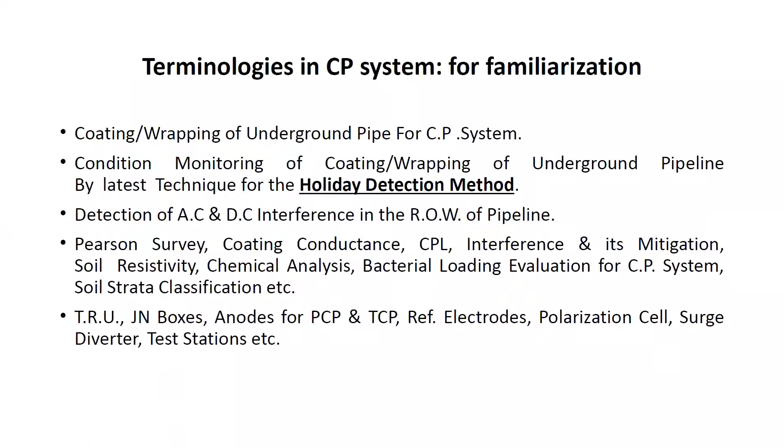Some of the applicable standards in engineering activities: as I said in the beginning of the presentation, since I work in a downstream gas processing unit, these are the applicable standards for mounded LPG storage bullets, where a cathodic protection system is there. We are following these two standards. The entire basis of design for the CP system used for the mounded bullet system is based on NACE SP0285

2011, which is for external corrosion control of underground storage tank systems by cathodic protection, and another standard called OISD 150. OISD stands for Oil Industry Safety Directorate. OISD 150 deals with design and safety requirements for LPG mounded storage facilities. NACE is a US-based international organization. NACE stands for National Association of Corrosion Engineers. They are the certifying body for level 1, level 2, level 3 surveyors and engineers for corrosion.

And OISD is an Indian body which prepares the standards for mounded storage bullets, which mention the CP system and the requirement of the cathodic protection system. So these are the applicable standards pertaining to my industry, to be precise.

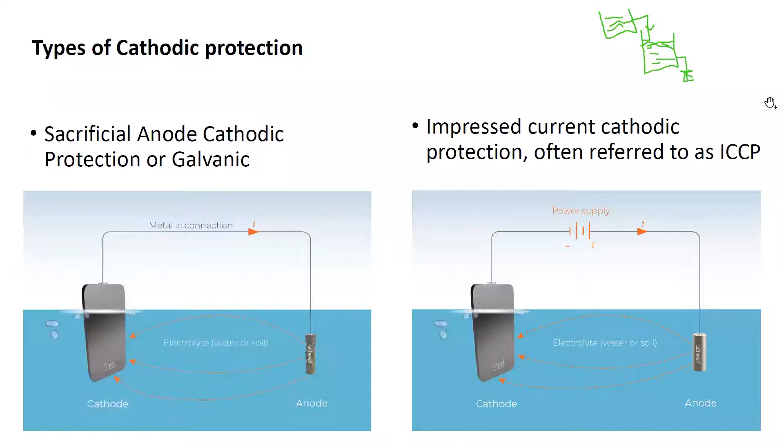Now, criteria for cathodic protection. Now, this needs to be deleted, right? Yes, sir. Okay. Hope you guys are following me.

Yes, sir. Okay. So, the primary criteria for cathodic protection are, I won't say three, there are basically four. The first one is the voltage, that is the potential difference with respect to a reference electrode, a half cell, a copper sulfate half cell. The potential difference with respect to the half cell when the protective current is on has to be between 0.85 to about 1.15. Now I'll explain. It may sound a bit confusing.

Now what exactly does this mean? Let me go to a picture so that I can explain it in a better way. So it says that the primary criteria for cathodic protection for underground or submerged steel or cast iron pipes are: the first one says minus 0.85 volt with respect to a copper sulfate half cell reference electrode with protective current on. Now what does this mean?

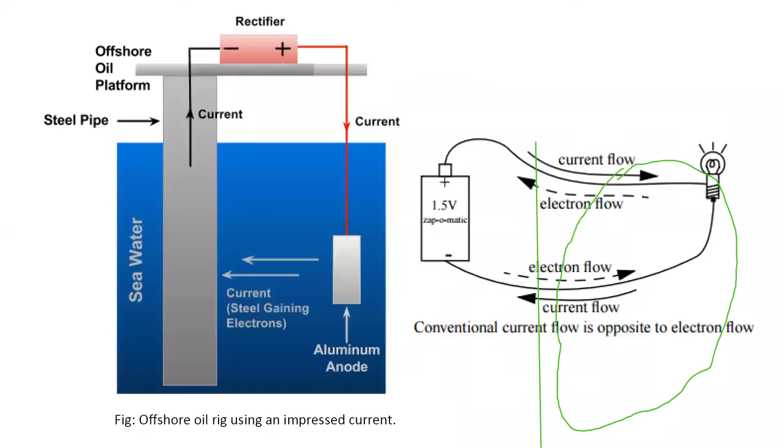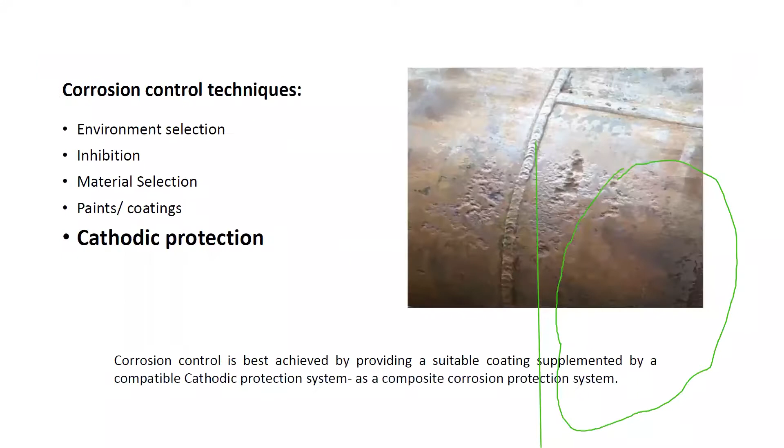Like this, if you take a voltmeter and connect one terminal to the ground and one terminal with a pipe, and try to measure the voltage. If the voltage is measurable in those conditions, then you will get a reading, and that is called natural potential. So you now know what natural potential is, right?

Next is off potential. As I said, off potential is when this is instant off. Off potential is when you turn off the power from the TR unit, and during the time the power is turned off, the potential difference between the CP system of the mounded bullet and the reference electrode. Okay, that is your off potential.

So the difference between off potential and natural potential should be 100 millivolt or more, and at the same time a 300 millivolt shift from natural potential with protective current applied, which means when the current is applied, the difference with the on potential. You remember I talked about on potential just a while back.

The on potential is when the power is on, the potential difference between the mounded bullet system and the reference electrode; that potential is your on potential. So the difference between on potential and natural potential should be 300 millivolt or more. Okay, so these are the criteria for cathodic protection.

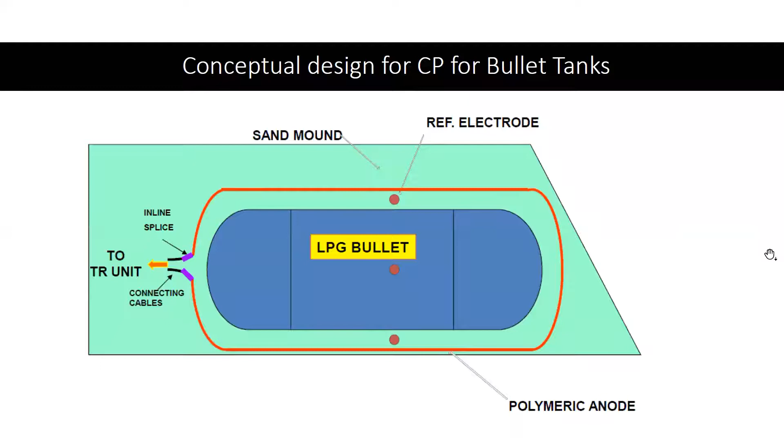Just to familiarize you with a normal setup, I am coming back to this page again and again. In a normal CP setup, this is how things will look. There will be a vessel. The vessel is the cathode, so it needs to be electrically charged from the negative terminal. The positive terminal will be charged through the anodic junction box and through the anode, the polymeric anode.

Now this is just a reference polymer. There are other anodes also. Different types of anodes, of course: magnesium anode, zinc anode, and anodes made of different alloys. The fundamental idea is the same. You need an anode which will lose electrons, and through impressed current you will be making the metal or structure to be saved a cathode.

And then there is the reference cell, which is connected with the REJB, meaning reference electrode junction box. In this structure there is an inline splice. A splice is nothing but a connector connecting cables. Then isolating joints. This is very important. These joints are also known as IJ, and in industry like ours, we have MIJ, called monolithic isolation joint.

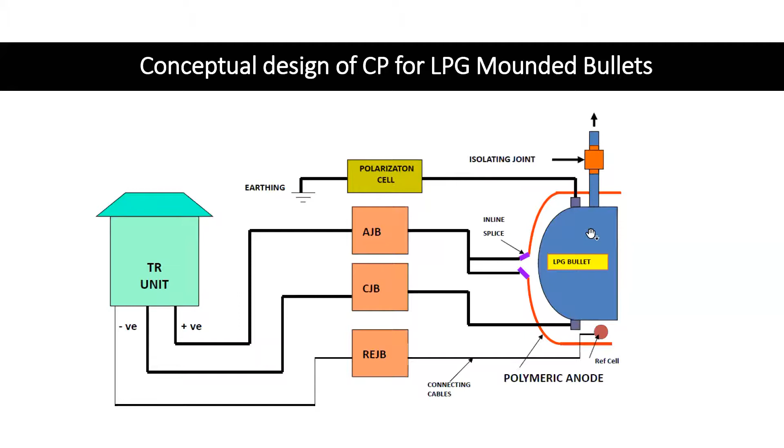Polarization cell has been provided. Polarization cell, as it means, polarizes. It just polarizes your cathodic setup so it doesn't get drained out. So yeah, next is

a mounded bullet setup. This is also how it looks. A number of bullets are there which are placed next to each other, completely covered in sand. There will be reference electrodes at various points, because in order to control something, we have to be able to measure it. So the idea behind putting reference electrodes is that we need to measure.

And then only we can determine the health, whether it is getting deteriorated or not, or it is maintaining a particular standard or not. That is why we need a reference. So the reference electrodes are for taking that reading. This diagram is showing a polymeric anode. It can be a metallic anode also. This is how it is placed. I mean, just in terms of location, if you think of a side view, these things are provided in this manner.

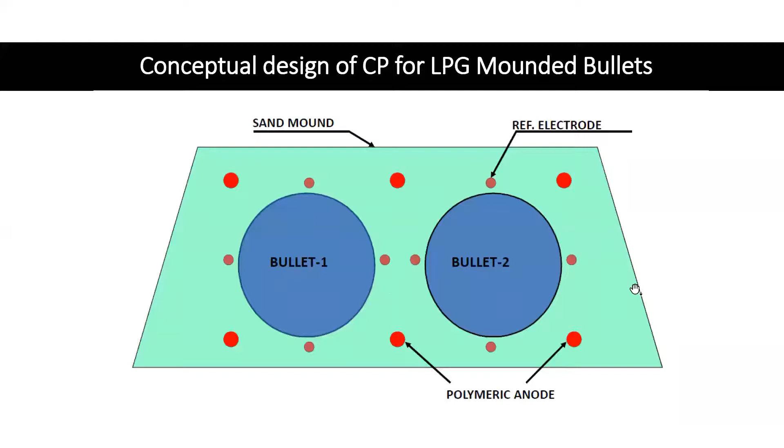Finally, corrosion monitoring. What do we do in corrosion monitoring? Cathodic protection of assets ensures prevention of loss of metal to earth due to soil side corrosion. When it is connected with soil, the corrosion reactions I have shown in the previous slides, we can restrict to a larger extent, if not entirely stop. More importantly, I am continuously emphasizing one term, that is cathode. The very fundamental idea is converting it into a cathode.

In that case, the electrons that the metal will lose through corrosion reactions will be refilled from the anode, and that is why the attempt is to convert the structure or the metal or the vessel or the pipeline into a cathode. Now, this is a dynamic process and requires close monitoring of CP parameters. It's not that we measure it once or we connect it once. We need to keep on measuring it to keep the system effective and efficient.

See, if the CP system fails or is not performing as per design, corrosion protection is ineffective. So that is why it needs to be measured and kept effective all along. And the best part of an effective CP system is that it can protect a structure for as long as 50 years or so. In Oil India itself, we have got a 1,156 kilometer pipeline for crude oil from Duliajan, Assam until Barauni in Bihar. That pipeline was commissioned in 1961.

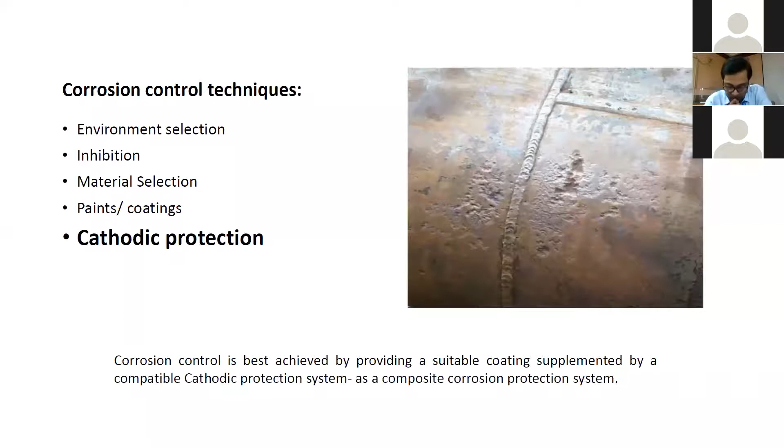Good afternoon, sir. Good afternoon. I have a question. Yes, Manish. So, what is the importance of open circuit potential in the electrochemical cell? Open circuit potential. Yes, sir. I am not sure. In the presentation, have I mentioned anything of that sort? Not in presentation, sir. Okay. But I have read about open circuit potential. That's why I'm asking. Open circuit potential. I'll get back to you later. I haven't heard about it or studied about it. I'm sorry. Sure, sir. It's okay, sir.

And Rishabh Shoni is asking about holiday detection method. Can you please explain it? Yes, holiday detection method. There is a device. It's very easy to find it in YouTube also. In YouTube, if you search holiday detection, there is a device which is kind of a voltmeter. Through that you can actually find out whether there is any leakage of voltage or not. So it is basically a kind of continuity test. So it is again a non-destructive test.

The other day when I was talking about PSM, some of you might be there, right? Process safety management. I was talking about mechanical integrity and non-destructive tests in that regard. So holiday detection is again a non-destructive test, NDT method, through which you determine the effectivity of this wrapping coating. This wrapping coating is done using coal tar mostly. So you get to know whether the thickness is proper or not. At the same time, whether at any place the metal remained exposed or not.

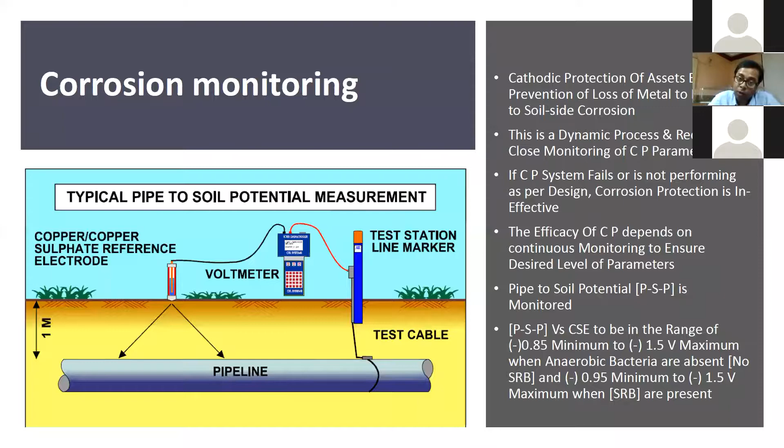Okay, sir. Can cathodic protection be used to protect ironwork exposed to atmosphere? Yeah, it may be exposed, it may be underground. Like in this case, the pipeline is underground. The mounded vessel I was talking about, this vessel was underground. In fact, underground vessels are more prone to corrosion, isn't it? More prone to corrosion because of a number of factors.

As I said, corrosion reaction takes place when it becomes an electrochemical circuit. The very fundamental idea is when it becomes an electrochemical circuit. For an electrochemical circuit, you need 4 things, right? Anode, cathode, electrolyte, and a connection. Connecting maybe a cable or some way or other. It has to be connected.

So the moment it becomes an electrochemical circuit, your cathode will start gaining electrons, and your anode will start losing electrons. Now, the metal structure which is buried, the moment it is buried, metals are usually electropositive, which means characteristically they are electron donators. So it will act as an anode. It will make a natural electrochemical cell with respect to another metal, and it will start losing its electrons.

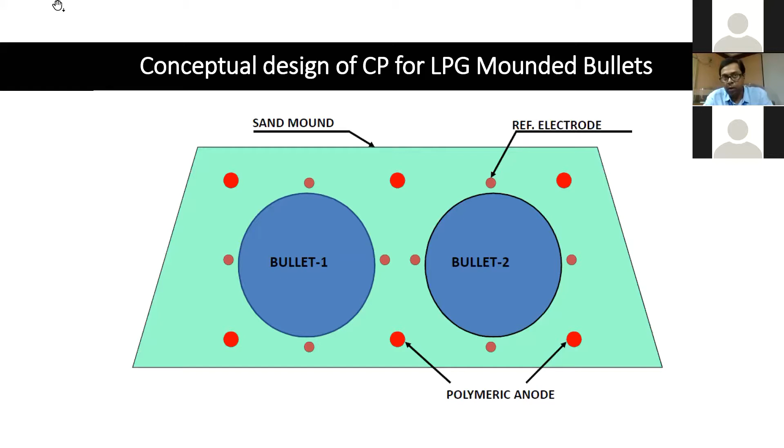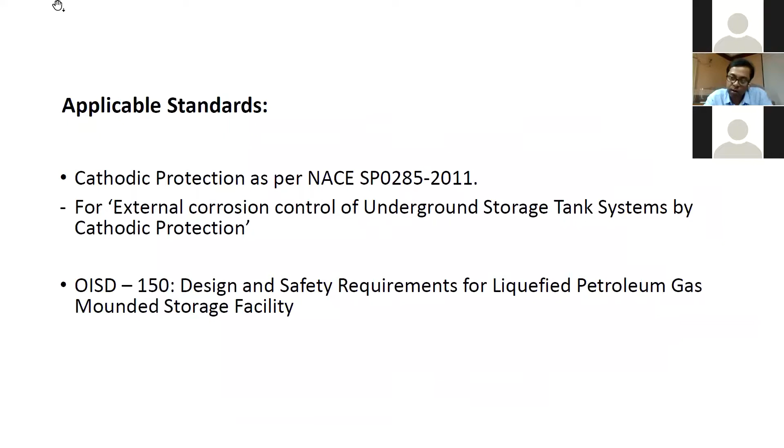Okay, sir. Is there any standard recommendation for the distance of anode bed and pipelines for impressed current cathodic protection in the soil? The standards I have mentioned here, I am aware of these 2 standards, that is OISD 150 and NACE SP0285, because we have here this mounded storage bullet. That's why in the beginning itself I mentioned it.

So far as I know, I have heard the anode should be within the range of 2 meters, but I don't know what the relevant standard says. In practical experience I have seen it is within 2 meters. See, the challenge is if the anode is kept at a larger distance, just from a conceptual point of view, what is the problem?

The problem is, when I'm providing an anode, I have to make sure that the anode is there to supply adequate electrons to my cathode, to the structure I am interested to safeguard. Now, if the distance is more, it is not going to help. It may get influenced by some other metals around.

Okay, and I don't want my anode, which in that case is quite possibly a sacrificial anode, to sacrifice itself for the sake of some other metals rather than the structure I want to safeguard. You understand what I'm trying to say? So the distance should not be more. So far as I know, it should be between 1 to 2 meters. But as far as the standard is concerned, I don't exactly know. I haven't followed that. I know these two standards for my vessels. That's all.

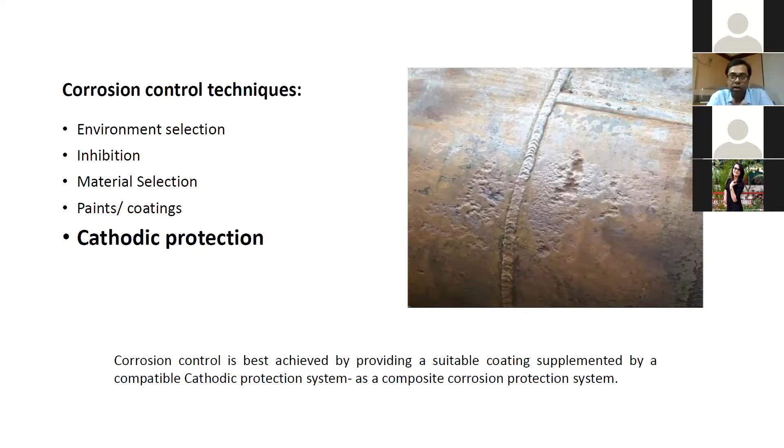Sorry, sir. One last question. If a pipeline gets struck by lightning, will the system be damaged? Remember that. So surge diverter and polarization cell, these are the two kinds of devices.

Are you guys with me? Can you guys hear me? Yes, sir. Yeah, okay.

So surge diverters are specifically a kind of device for this additional surge in voltage. What happens when lightning strikes your pipeline or your vessel? A sudden increase in potential difference, isn't it? A sudden increase in your current. So a surge diverter is a device which will take care of that, so that additional current will not damage your system, but will go immediately to your earthing. That is why this kind of setup is always thought of during the design phase itself and implemented. Okay.